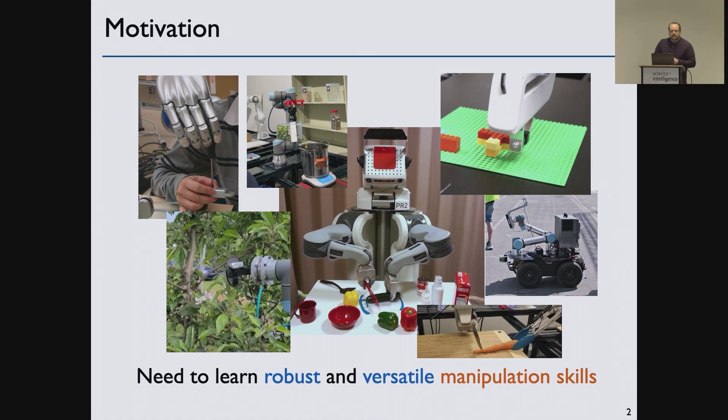So we need some way to think about how we break that down, how we make it more accessible, and how we have robots that can actually learn the manipulation skills needed to perform these tasks.

When we think about manipulation skills, I always think about three core columns. First, we want them to be versatile. This means generalizing to new situations - using components from a given task in a new task, and being able to handle variations in objects between tasks or even within the same task.

It's also important that we can learn efficiently. You can imagine this as using very small amounts of data, but I think it also really means being able to incorporate different kinds of data. Sometimes learning from demonstrations is better, sometimes you want to learn from self-supervised or reinforcement learning, or you have data from the internet.

Prior learned models - there are lots of different places where you can get prior structure. Learning efficiency is really about combining those together in order to perform new tasks as quickly as possible.

Finally, we also want our skills to be robust and reliable. To me, this means not just avoiding errors - as a clumsy person, I still think I'm fairly reliable - but we need to be able to detect when errors happen, and we need to be able to recover from errors when they do happen.

That can take on various different forms. Maybe we have to learn a new skill, maybe we have to replan, maybe we have to ask for help. But being able to detect when errors happen is a very key part of making these robust and versatile manipulation skills.

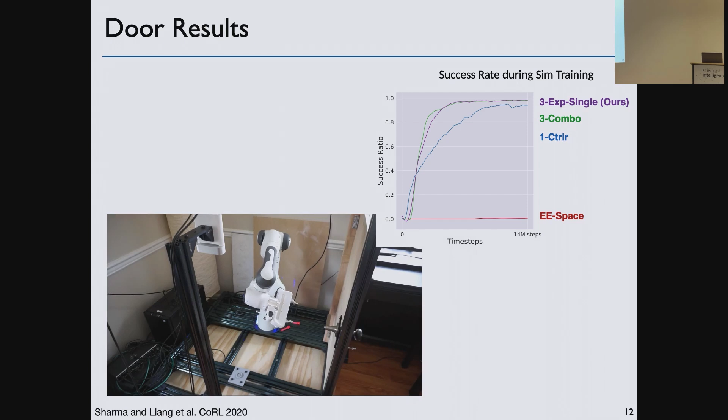So the real-world policy, the real-world experiment, is to use the policy trained in simulations. At this point we were still learning everything in simulation. Here you can see training steps, 14 million, fairly expensive training. We trained these in simulation and then ported them over to the real robot. This was 2020, during COVID time, so this is actually Jacky's apartment where this was happening.

We also did a screwdriver screwing task. Again, we can learn it nicely in simulation, and we can port it over. It also generalizes between different screw sizes.

But there was a lot of exploration involved in this, and one of the problems was that every 10 steps it could choose a different action. In some ways it was a very difficult problem because there might be multiple controllers to move you towards, for example, the handle or the screwdriver, and it's not really clear which one's best. They're all moving in the same direction.

So in later works, what we did is we said, okay, we're not going to relearn this every 10 steps, but we're going to have it as a complete skill. Usually if you want to do something like inserting a screw into a screwdriver, there are certain axes that you can use. You don't need to constantly be changing that coordinate frame you're working in.

So for this paper, what we looked into is using a little bit of learning from demonstration as well. What we can do is look at our objects, generate a whole bunch of key points on the objects in our hand, create different axes, different controllers, and what you get is this fairly rich space of different potential skills to use.

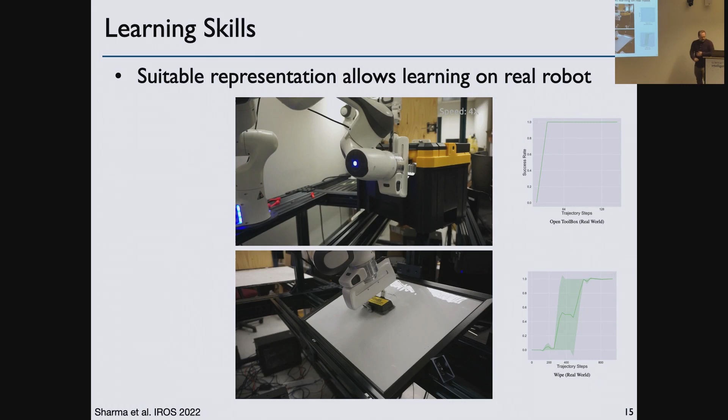At the bottom, how many different dots are those actually? How many different dots? How many actual experiments did we see, or did it loop? Oh, I think it might have been looping. So this is also, I think, after the learning. During the learning, the student was also moving the plate around to different locations and stuff like that. But slightly frustratingly, they didn't take a video of that. And I don't think it's just looping - I think the dots are slightly different. It could be that there's a couple of different ones, but the plane, for example, is always the same.

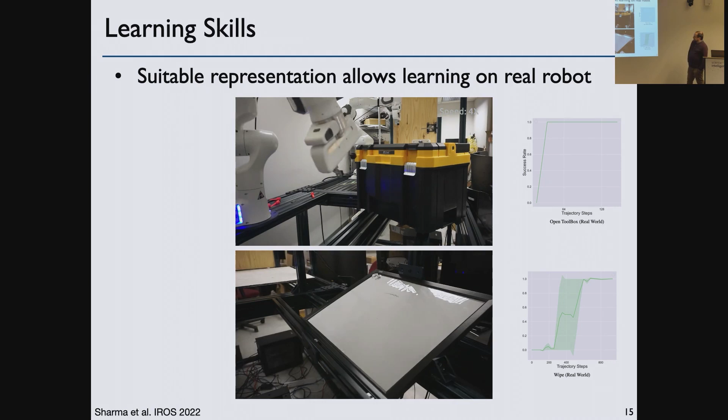All right, so again, thinking about how do we structure policies, this project was looking at the idea of, if we have a very simple model of our environment, what can we actually use that for?

Classically, there's a lot of domain randomization and kind of hoping that we're going to have a very small shift to the real world. But we kind of thought that there's a lot of structure that we can get from a simulation.

So if you think about intuitive physics, I think we've all had situations where we thought the world was going to work a certain way in our head. It doesn't quite work that way, but we can still use our intuitive physics to remove a lot of irrelevant objects, right?

So, if you're trying to open up a door, you may not have a great simulation of that door, but you can probably work out the fact that it doesn't really matter that there's a water cooler next to it or a hat rack, as long as they're a little bit away from it. But things such as the width of the door is going to be very important. Height probably isn't that important.

And so we wanted the robot to be able to do a similar kind of reasoning using a simple model of the world. So the key idea is that you're going to have a bunch of different context parameters, object parameters, you can think of these. We want to have a neural network, or in some cases even a linear mapping, to some skill parameters - for example a DMP or just simple waypoint parameters. And rather than taking all the different objects in the scene, which is going to get bigger and bigger as scenes get more complicated, we want to be able to identify what are the relevant ones. To do that, we use a simple internal simulation and perform causal interventions in it.

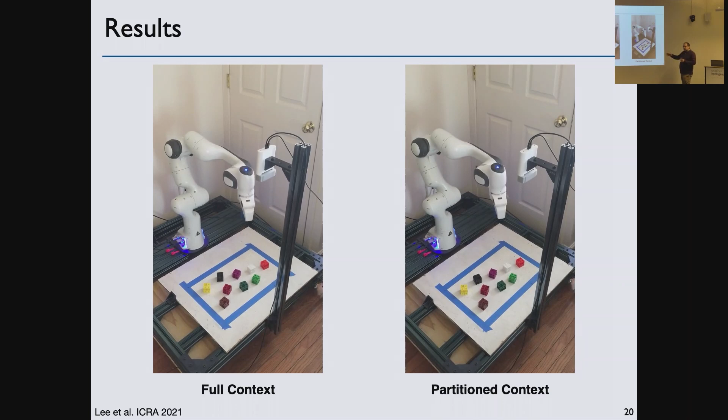And here you can see also applying this on the real robot. It seems like a very simple task, but when it starts trying to reason about all the different blocks in the scene and trying to learn a policy for that, it is very easy for it to add up all these errors. Things might be something close to zero for a lot of their positions, but those can add up, and so it can still fail even on something that looks fairly trivial in terms of block stacking.

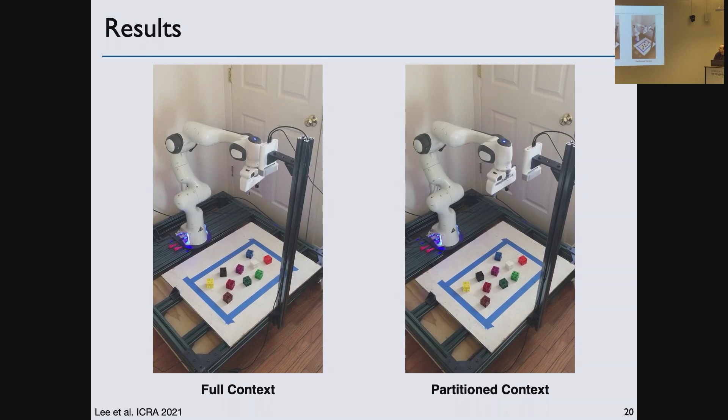So we continued with this project, thinking about the fact that if we can identify sets of relevant variables, maybe that would be a good way to identify distinct kinds of skills. You can imagine, for example, trying to open up a door, where maybe one skill has to unlock a door, others might just go for the handle. So you could learn two skills: one for opening up unlocked doors, and one for unlocking doors and then opening them up. The way that we approached this was to say we have a general space of context.

Again, if we think about block stacking, we can provide the robot with a bunch of these different instances. We can perform CREST, which was the algorithm I was just explaining on the previous slides, and we can use those to identify different situations where different variables are more relevant. So you might have some cases where it's sort of linear, they're all in a line, so there's a much higher probability that you're going to have an obstacle between them. In some cases, if there's an obstacle object, that's going to be considered relevant, but if there are situations where there's no obstacle between them, then we don't have to worry about that.

Once we have our data generating regions, so we have divided our context into different regions, we can learn policies for each one of them. The preconditions of those policies might still be a little bit bigger - you might have something that still works in these other domains, even though they were only trained based on their data generating regions. And then ultimately, we can pack the preconditions together with our policies and create a skill library.

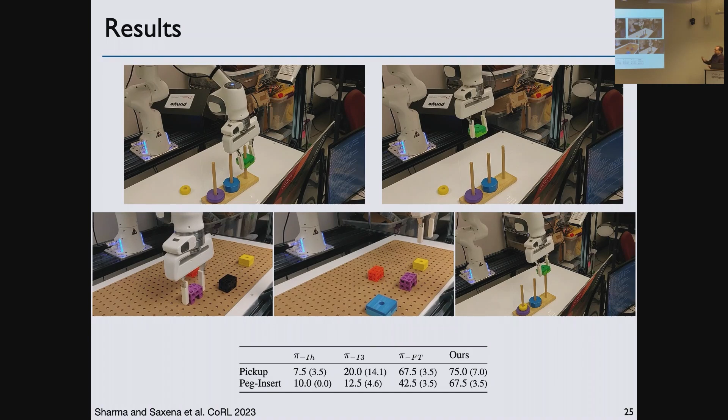All right, so just some of the key takeaways from what we've seen so far. We should be thinking about composing skills from multiple object-centered controllers.

I'm much of the mind that we should have more tailored skill representations - the robot should be able to choose what kind of representations it should be using. If we do that, we can get much more efficient learning because often we only need to learn a small number of parameters, and we can reuse a lot of these individual controllers between different tasks.

If we have an internal model, sure, you can do domain randomization, but it's also very useful for actually structuring the skill, trying to figure out what's relevant and what's not, doing this causal reasoning and interventions in simulation. It allows you to quickly reduce the space of your state space to the things that are really important for that specific skill.

And then finally, consider the complementary strengths of sensors and how you can really extract that by thinking about the data that you give, the augmentations, and also the architectures and pre-training.

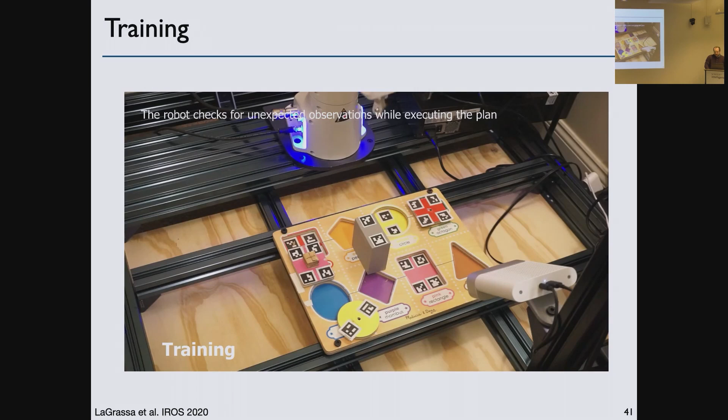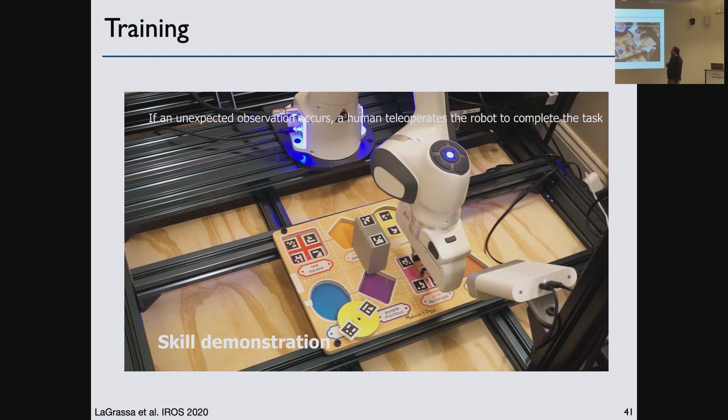So here you can see the training. Effectively the robot has a model, predicting every step what it's going to do. It's executing it as best as it can. It realizes that there's been a deviation, and at this point a human takes over and gives a demonstration of how to perform the task from that location.

Once we switch over to test time, it can create a plan and see whether the plan is going to fail. If it does predict that it's going to fail, then it's going to instead learn a plan to the preconditions of that skill and execute it from there.

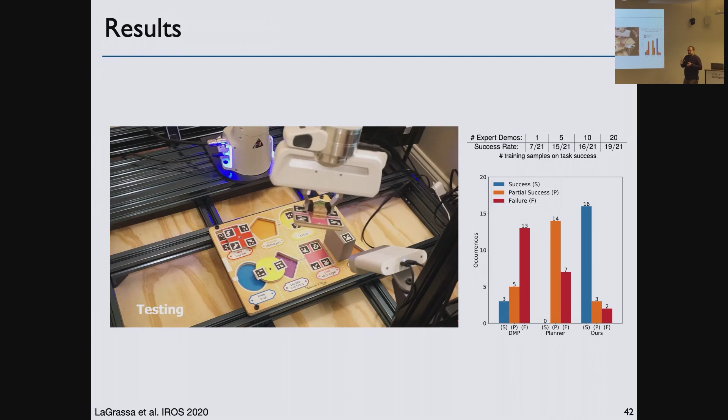I'd say the key insight from this one is that this combination of planning and learning is very powerful, because it means the learning really only needs to focus on the situations where it's really needed. Learning to effectively move from any location to the insertion is fairly difficult—there might be lots of different obstacles.

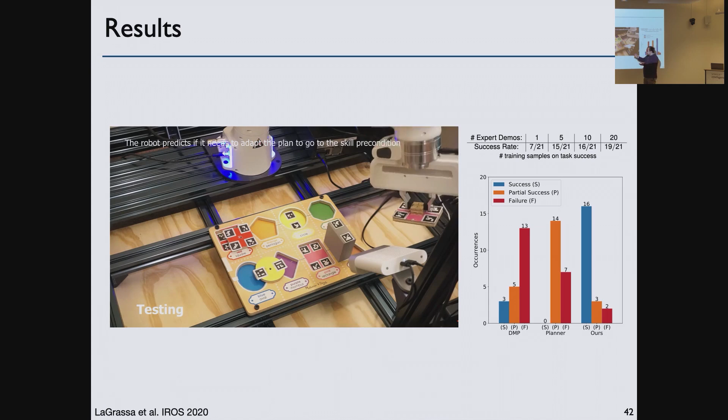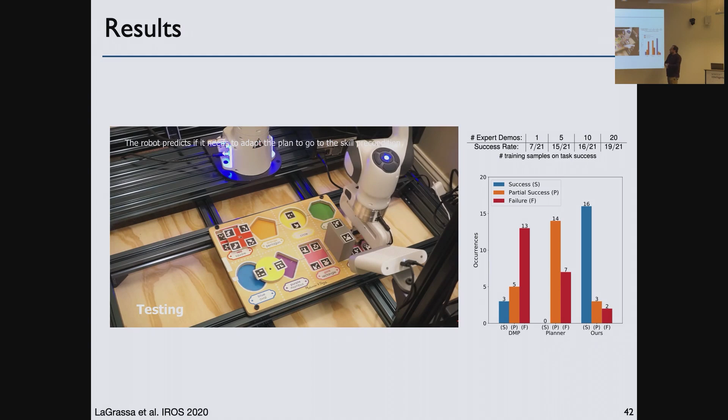It's unnecessarily difficult because the planner can handle that. So really where we need learning is just right at the end for that small little bit of insertion. We can use like 20 demonstrations to nicely learn this task rather than trying to get demonstrations from the entire scene, because we're leveraging the planner in situations where it's applicable.

All right, this is recovery learning, also a great paper by Shivam Vats. It's also looking at this idea of figuring out how we can make a sequence of skills more robust by figuring out which recovery skills to learn, so where to get back on track. If people have questions about this, I'm happy to go back to it later.

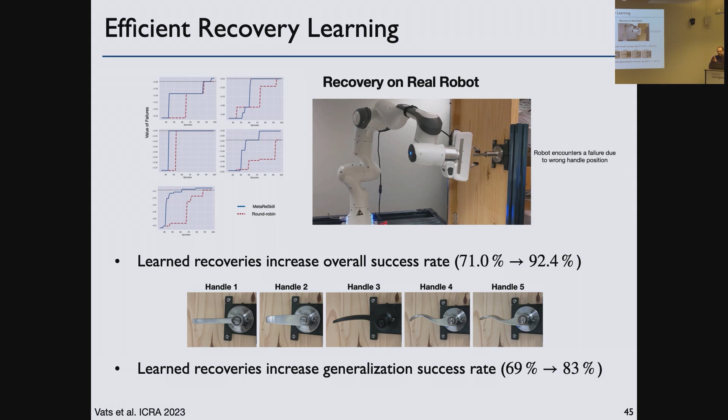All right, so some of the key takeaways, looking just at the first two. Often complex scenes can be decomposed into simpler interactions, so we can focus our interactions on those smaller interactions and then combine them to represent more complicated scenes. It's also very important that robots know their capabilities. If you're using any kind of model, it's great to use models, but they will always have their limits, and you can have the robot reasoning about those limitations to increase the robustness of the system overall.

All right, so the third and final part that I want to talk about is modular hardware.

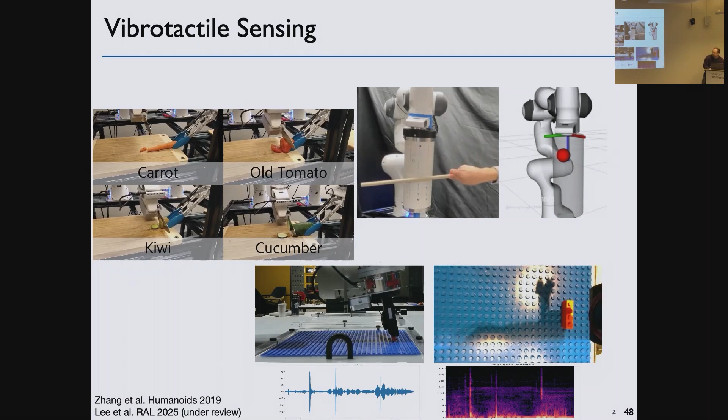We're very excited about vibrotactile sensing, and acoustic sensing as well. We've done some work on, for example, identifying different vegetables based on vibrations in the knife. We've also been looking at contact localization based on vibrations in this sonic boom tube that we have. There's three microphones in there, and based on the signals from those microphones, we can localize where on the tube it's actually being struck.

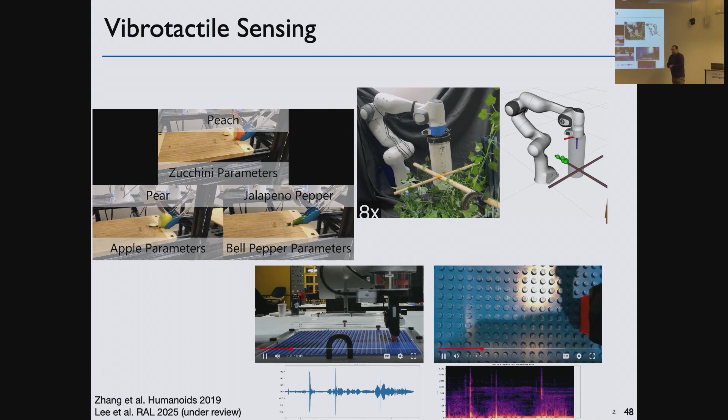We've also been looking at things such as detecting successful and failed Lego placements. One of the reasons we focus a lot on contact microphones is because they're very robust sensors. They can be hidden away on the back of the object, not directly interacting with anything. The vibrations go through the objects, so there's a certain robustness to that.

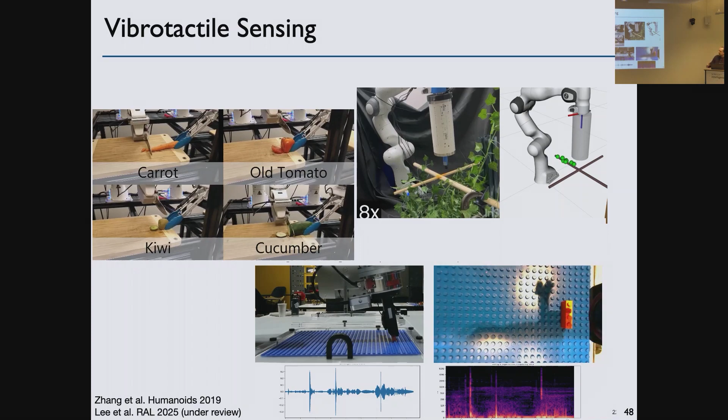We can't always have that. If we're thinking about things such as tactile sensors, like GelSight, those are going to have to be making contact. If we have any kind of probing sensors, those are going to need to be interacting as well. So here we have a project, a collaboration with George Kantor, looking at agricultural robots.

So we have these corn stalks in the field. We want the robot to go and insert a nitrate probe into them in order to get a reading of what the nitrate levels are. Nitrates are very important for looking at the amount of fertilizer that plants are absorbing. Sadly, thinking about climate change, we need to stop over-fertilizing food, and also make sure we're finding the kinds of crops that can absorb fertilizer more efficiently.

And so we have these little nitrate sensors. There are two little electrodes here, and they have coatings on them that effectively connect to nitrates, and that changes the conductivity. We didn't design the sensors ourselves—this was a collaboration with Iowa State University. But what we need to do is go around and place these fairly close to the ground into the middle of the stalk so that we can collect readings.

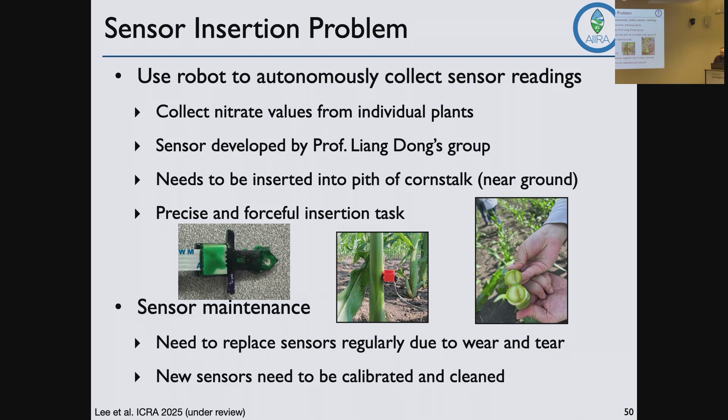As you can imagine, it's a fairly forceful interaction. We're literally taking a little stick and jabbing into the side, and every so often we end up losing or scratching off the surface of the sensor, so we need to be able to replace them. So one of the things we looked at is designing it so the robot could replace the sensor itself. Here you can see a closer up of the robot.

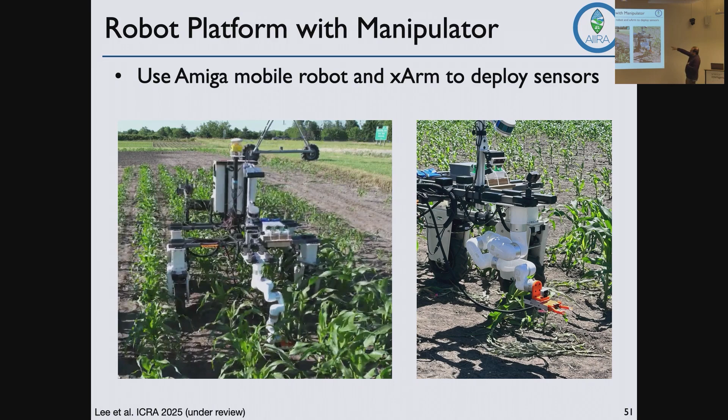Here we can see the arm underneath the platform with our gripper that we designed. This gripper has a single actuator. As we move the actuator forward, it closes its fingers around the object—in this case the corn stalk—and it's got the little sensor which gets stuck into it at the end.

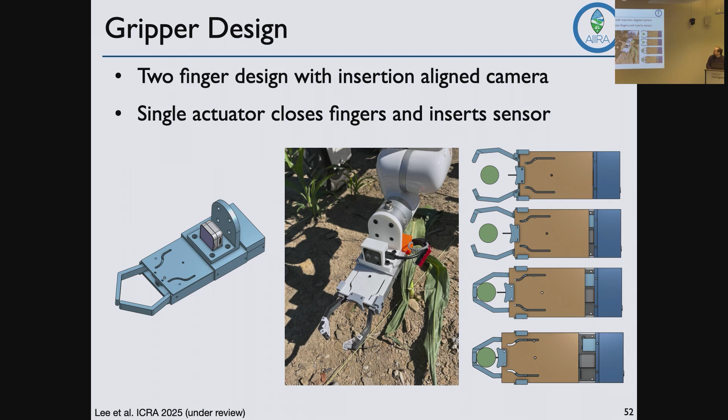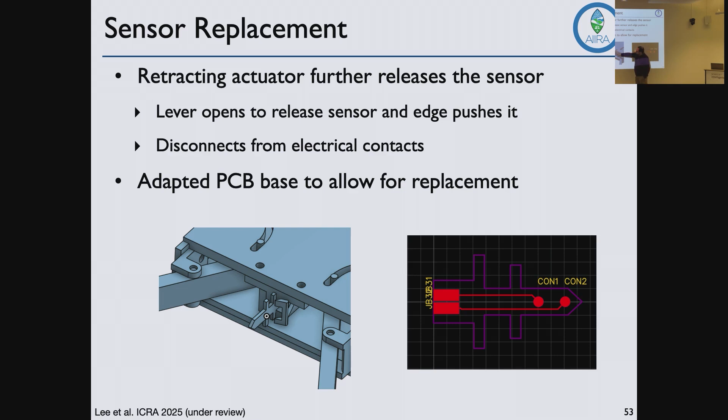And if we drive the actuator in the opposite direction, so we pull it all the way out, we also loosen the sensor. So effectively, we made each of the sensors so that's a simple PCB board. It's got 2 contacts. It has a sort of tree-like shape so that can kind of get hooked in through the sensor, so that when we pull all the way back, the little lever moves to the side, it frees up the sensor, and now we can actually replace it.

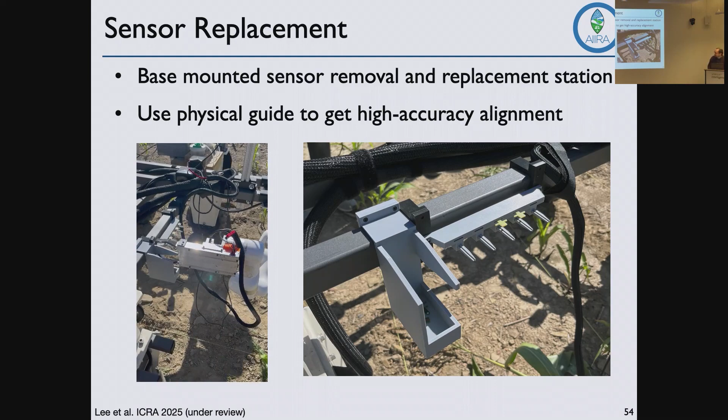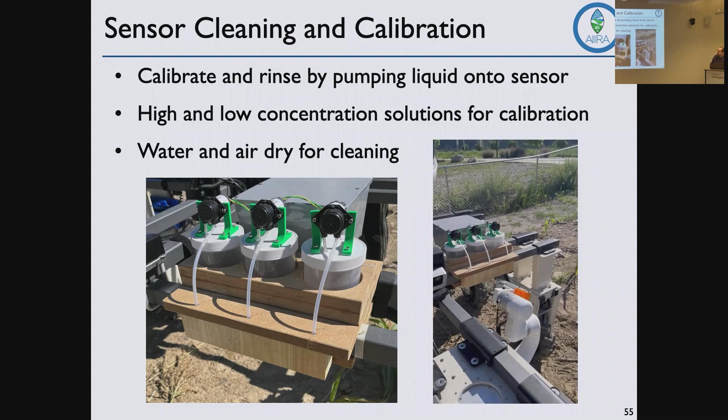So as we're switching out the sensors in the field, it's also important to think about calibration. So we also looked at designing a calibration suite. We have high nitrate solution one, low nitrate solution the other, and just distilled water in the third one for cleaning. So we can effectively go out into the field, switch out a sensor, calibrate it, and then go for the next insertion, which looks a little bit like this.

So we actually took the robot from CMU over to Iowa. So a nice long car ride. Some of us got to fly, which was nice.

And we evaluate the system. We're still kind of in some cases off by a couple of millimeters, so it is a very high precision insertion that you need. Even if you're 2-3 millimeters off, you might get one of the electrodes sticking out, so we're still getting some of the failures at the bottom here from that. We're getting overall about 50% success rate. Also a little bit of making sure we are close enough to the ground, something we need to work on. But we can run this reliably on its own so that it would, in between every couple of cornstalk insertions, replace the sensor automatically and be able to get that data.

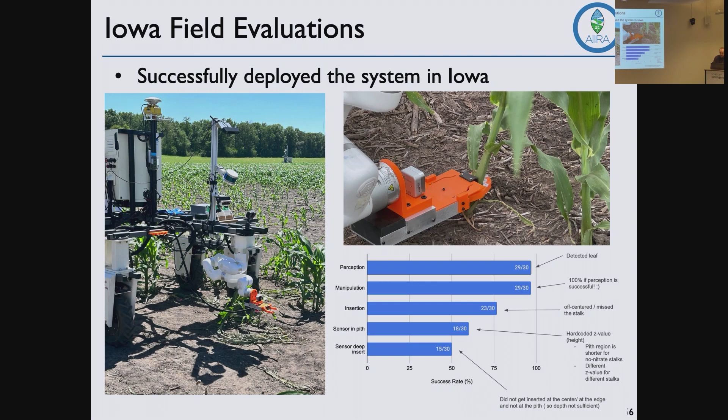So when I became a junior professor, I made myself a promise not to design a hand. I thought there were no good hands out there. Why are there no good hands? I know I will make the good robot hand. And then a few years later, people kind of be like, oh, you know what, I realize now why it's difficult. I think everyone in this room knows how difficult it is to design a good hand. And so I told myself I'm not going to work on developing hand hardware. I didn't quite keep that promise.

And there's a reason. So I think the key thing is don't do it alone. You need people who actually know mechanics, who understand material properties. In my case, that was Professor Zeynep Temel.

And so what we've been working on is actually developing delta grippers. So these are hands, or arrays as you'll see as well, based on the delta robot design. Effectively, we have 3 linear actuators. We have this parallel linkage system for each of our fingers. And as we expand and or retract each one of these, the fingertip is going to move in XYZ. So effectively, you can keep nearly parallel fingertips, but move in all 3 translational directions.

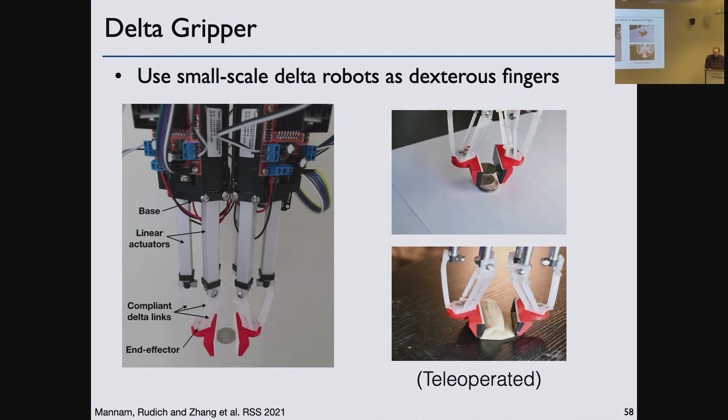I think this was actually a really important step, not just because it's cool to have an array, but also because it really forced us to think about fabrication. One of the nice things about this system is that the parallel linkages, each one is just a single 3D printed component. It has living hinges. You still need to put a fingertip on top of it, but you can easily modify that design by just changing the length of the linkages.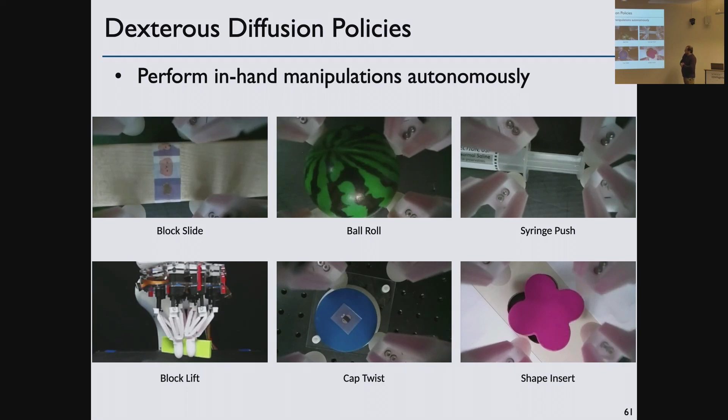So, key takeaway thinking about the reliability of robots: think about having robots being able to actually replace their own sensors or critical components. For that sensor insertion, it was just one PCB that had to be replaced, but we can do that autonomously. And make sure to also have everything you need in the field, like the calibration methods.

The modularity for the delta, I think, is really exciting because it really creates a space of potential designs for the hand. So you can easily tailor for bigger hands or smaller hands depending on your application. Like I said, I think having this 8x8 grid really gave us a strong drive towards easier fabrication methods. I think it's opened up some interesting new challenges in robot dexterity.

And last but definitely not least, this is a great example of using collaborations to explore new areas. I was a little bit hesitant to work on hands. I'm really excited about the hand we've developed now with Zeynep Temel. Agricultural robotics, there's a lot of overhead in getting to that area, right? Like you need to know people who actually have fields, you can't just randomly go into cornfields with a robot. And so George opened up a lot of possibilities there.